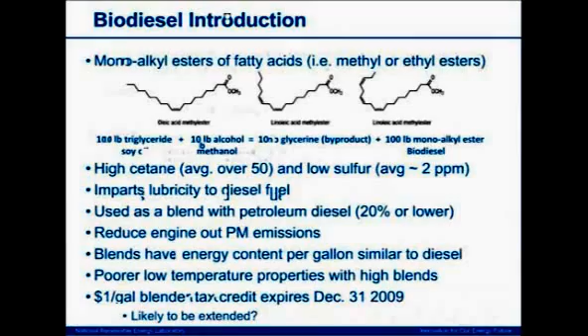This was also made worse by the U.S. government's non-implementation of the Renewable Fuel Standard Part 2, which likely will be implemented in 2010. So 2008 total production, according to the Energy Information Administration of the U.S. Department of Energy, was about 800 million gallons, and 2009 production is projected to be about 475 million gallons. So I think it's safe to say that 2009 has been a rough year for U.S. biodiesel producers.

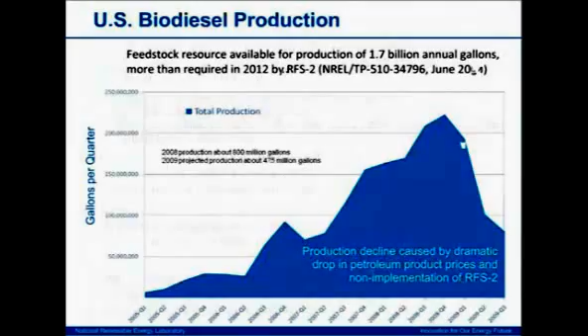One of the important things that addresses many of the market barriers for biodiesel has been the development of ASTM specifications that ensure the quality of biodiesel. The D6751 specification for B100 has been around for quite some time. This is for B100 to be used in blending petroleum diesel biodiesel blends up to 20%.

There have been a number of changes, more than just the two I list here, made over the past two to three years that were necessary to move biodiesel blend specifications forward at ASTM. I think the more important ones were oxidation stability and the addition of a cold soak filterability requirement.

Based on these changes to the B100 requirements, ASTM D975, the conventional diesel fuel spec, now allows up to 5% biodiesel in conventional diesel fuel. The heating oil specification also allows up to 5% biodiesel. And then there is a separate specification for higher level blends.

For the D975 and D396 specs, the performance requirements for B0, or 100% petroleum diesel, are essentially identical to those for B5. In the B6 to B20 specification, there's some modification of the requirements and the addition of some new requirements that appear to be necessary if you want to use these somewhat higher biodiesel blends.

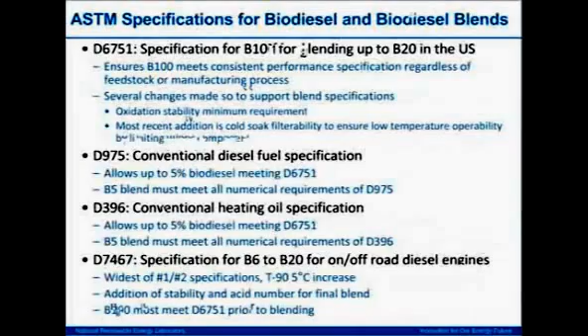So I think the two things, as I noted, that seem to be the most important changes are the addition of an oxidation stability requirement. This is a requirement that the B100 has to meet to ensure that it's adequately stable in storage. And then the stability of the B100 is really the main factor that affects the stability of the biodiesel blends.

And then also the cold soak filterability requirement. This limits the presence of minor impurities in biodiesel that have been shown to precipitate out at cold temperatures, but temperatures above the cloud point, and in some cases cause fuel filter plugging in winter conditions.

The cold soak filterability requirement was added a little more than a year ago, and by all accounts it's led to a dramatic improvement in the quality of biodiesel, both in terms of a reduction in low temperature operability issues, but there's anecdotal reports that it's led to improvements in a number of other ways as well.

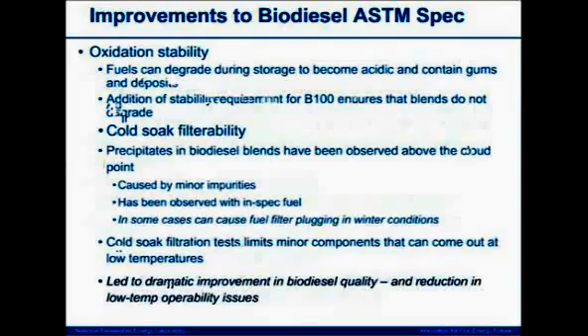Related, I think, to ASTM specs is the position of the engine manufacturers with respect to biodiesel blends. Basically, I'm not going to go so far as to say every engine manufacturer is approving of 5% biodiesel, but very nearly every engine manufacturer approves up to 5% biodiesel. Some approve higher blends, B20, and in a very limited number of cases, there's approval for even B100.

There's a detailed list that can be found at the National Biodiesel Board's website. These position statements are updated very frequently by the OEMs, so it's important to not rely on a year-old statement from a particular OEM. You really need to look and see what the most recent information is.

Some of the things that are limiting certain OEMs to B5 include concern about lube oil dilution from the fuel. Fuel always gets in the lube oil, but for slightly older engines, this hasn't been a major issue. For engines that use the engine's in-cylinder fuel injector to inject fuel during the exhaust stroke to regenerate the diesel particle filter, you can get very high levels of lube oil dilution with fuel, whether it be biodiesel or conventional diesel fuel.

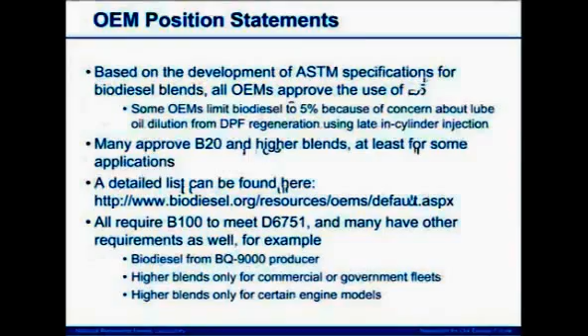But concerns about having these higher levels of biodiesel in the lube oil are preventing some OEMs from approving higher blends. Now, the biodiesel industry has a quality program called BQ9000, and essentially this requires the company that wants to be a BQ9000 company to develop basically a manual of procedures that they will follow to ensure that every drop of biodiesel they produce meets D6751. And then in addition to having these procedures in place, they are audited on site to see how they're implementing the procedures and to ensure that they're actually doing it.

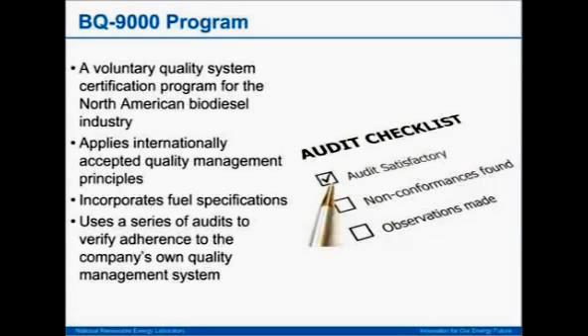This has been a very successful program, in my opinion. Over the years, we've gotten to the point where certainly more than half of the biodiesel production in the U.S. comes from BQ9000 companies, and over the past year it's been closer to two-thirds.

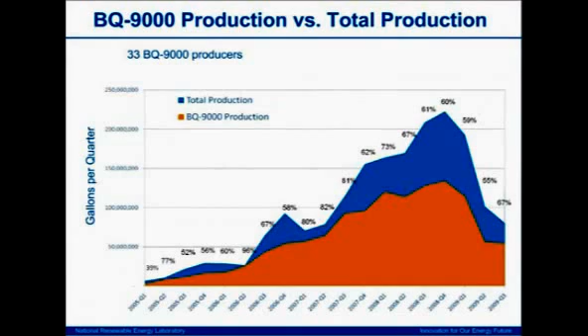We at NREL have periodically surveyed the quality of biodiesel in the United States by collecting B100 samples. The last time we did this was in 2007, where we collected samples from biodiesel producers representing 70% of the volume of production. We found that overall 90% of the production volume was meeting the requirements.

There were 15 producers that produced well over half of the biodiesel produced that year, well over 3/4 probably. And for those producers, 94% of the production volume complied with the spec. We had one sample out of that group that failed for water and sediment, so somehow became contaminated.

And then in the medium-sized producers, there was really a much poorer level of compliance, although at least one of the medium producers was a BQ9000 company, and their product was in compliance with the spec. And then the very small-scale producers had a much poorer record of compliance with the spec, although I have to note that we've worked with a couple of small-scale producers that do produce a high-quality product.

We currently have a biodiesel blend survey underway this winter, and in the spring we'll be doing a new B100 survey to see how the industry is doing now.

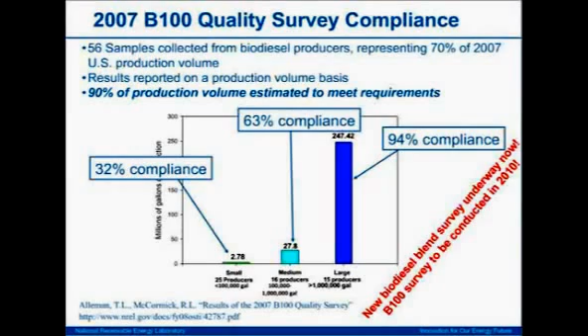I'm going to shift gears a little bit from my last couple of slides and talk about biodiesel's impact on air pollutant emissions and emission control equipment. There seems to be a pretty broad consensus that for engines not equipped with a diesel particle filter, biodiesel will reduce emissions of particulate matter, CO, and total hydrocarbon. For NOx emissions, there's been less consensus on what the effect of biodiesel is.

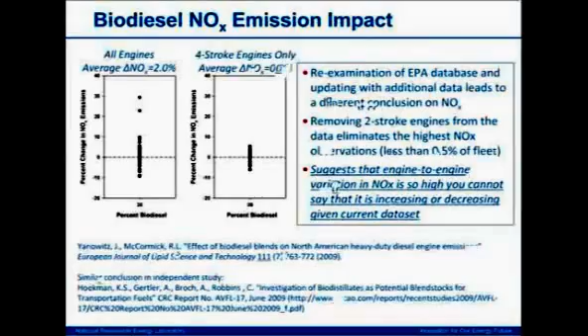And then the last thing I wanted to bring up was ongoing research on how biodiesel affects advanced emission control technologies such as diesel particle filters or urea SCR catalyst systems. All on-road diesel engines sold in the U.S. today are required to have a diesel particle filter, and beginning next year we'll start to see the introduction of NOx reduction catalysts. For biodiesel, there's some concern that it might cause short-term or immediate effects on the performance of these devices, and also concern about long-term durability impacts.

Studies to date have not shown any negative short-term effects. We generally see these devices performing the same with B20 as with conventional diesel. And there's some evidence that biodiesel may improve the function of diesel particle filters by increasing the reactivity of the soot and lowering the temperature required for regeneration. So the remaining concern is really the long-term impact of biodiesel on these devices, especially for heavy-duty applications where the defined useful life is 435,000 miles.

And most of this concern is related to the potential for there to be low levels of metals in biodiesel, sodium, potassium, calcium, and magnesium, which could lead to high levels of ash accumulation in the particle filter or some chemical deactivation of the SCR catalysts, particularly if the metals were present at the spec limit, which is 5 ppm for sodium plus potassium and 5 ppm for calcium plus magnesium in the B100.

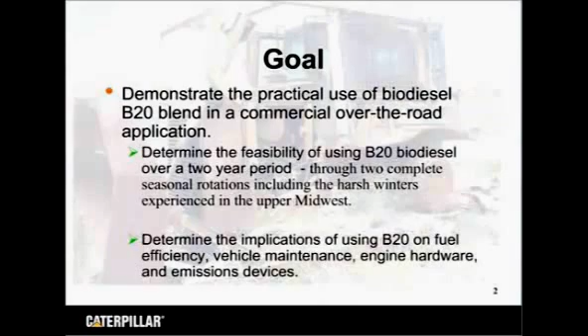So the goal was to demonstrate the practical use of biodiesel in an on-highway trucking application. So basically, what we were looking for here is the feasibility, the practice, the issues, and the implications on the on-highway trucks that use B20 in this study. This was definitely a collaborative effort, and a lot of organizations and companies participated in making this study a success.

The study design, which actually was probably the longest study of its kind of this level of biodiesel, had 20 total trucks, 10 of which were a control, and these were the ultra-low sulfur diesel fuel, and 10 were the B20 biodiesel fuel. In each group, there was one 2007 model engine, and the rest were 2004. The importance of the 2007 model is that it has after-treatment emission devices, particularly the diesel particulate filter, which Bob also talked about a little bit.

The trucks were matched in pairs, and they all had similar routes, similar design. One important thing to note here is that all of these had new engines, and these were Caterpillar C13 engines, which means that the implication of the history of the engine was removed in this study.

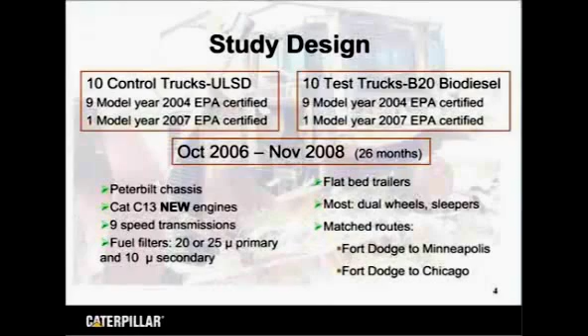The study design, there was a lot of data collection, significant. On a weekly basis, there were downloads from the trucks to understand their idle time, their speed, their fuel economy, the distance, so on and so forth. On a monthly basis, the fuel was tested. Oil analysis was done at the maintenance intervals. Maintenance records were kept meticulously of all costs related to the study. And when the study finished, we conducted hardware analysis. We tore down a few engines and looked in detail at the parts.

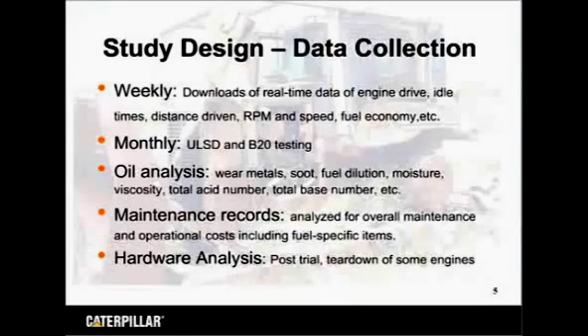Again, the study design, the fuel was mainly soy methyl ester. So it was an SME. It was provided by Renewable Energy Group, which is a BQ-9000 producer, and that's very important too. For a small portion of the study, 20% animal tallow biodiesel was used.

I also should mention that this study went through more than 2 years, from October of 2006 to November of 2008, and this means that it went through 2 harsh winters. And those who know the Midwest here, you know that we get very, very cold climate. So it's a significant challenge to see how biodiesel works in the cold winter temperatures.

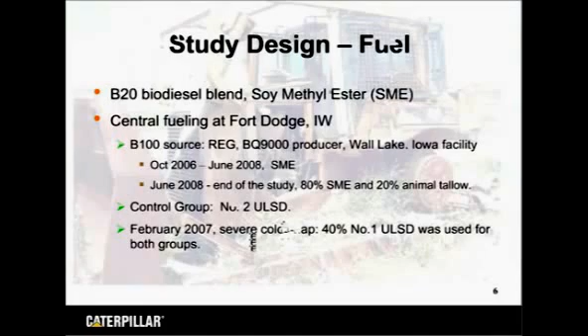The results that we saw here is that in using 6 commercial cold flow improvers, which are typically used with diesel fuel, we noticed that higher concentrations had to be used with biodiesel, and some of those that were successful in diesel did not really work well in biodiesel. And that's something important to keep in mind. So if you're using biodiesel, you really need to try which cold flow improvers work best for you.

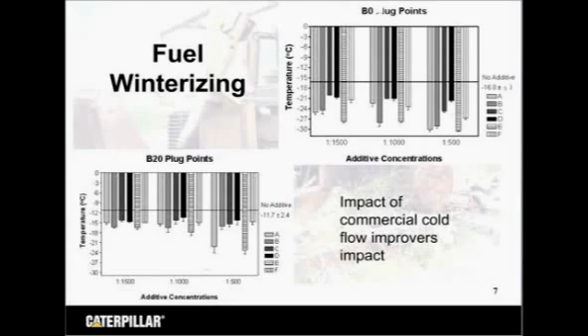In terms, again, of winter driving, the issues that we saw were basically fuel filter fouling, plugging, that is. There was no fuel gelling, probably because it was blended well. I also want to say that the fuel was very, very controlled. The trucks only fueled centrally, so there was no fueling on the road, so that we know exactly what the fuel was that went into the trucks.

I'm giving you here some of the numbers to show the difference in fuel fouling in the filters that were used. Some of these were preventive, that is, they anticipated fouling. Some of them were really fouled filters. What did foul the filters? Gas chromatography analysis showed that these were completely saturated monoglycerides. And we will have a report that details exactly what the chemical composition was.

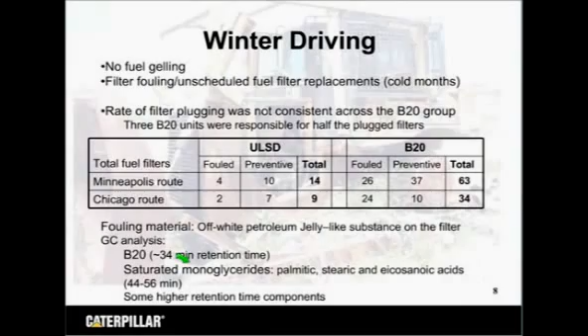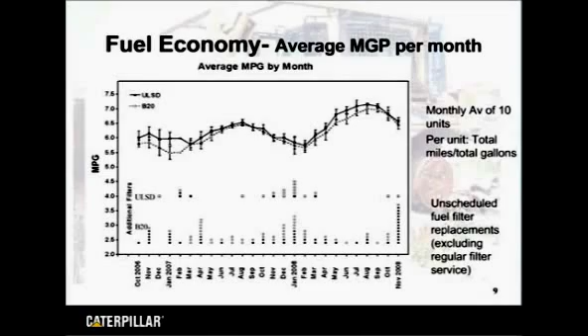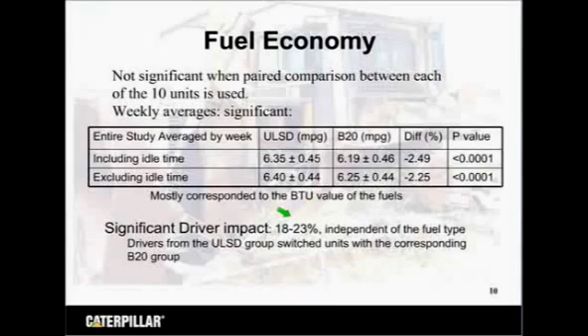Looking at fuel economies is very interesting because if you look at just drilling through a lot of data, you see that actually there isn't much significant difference between the two. But if we keep drilling into the data and use weekly average, we see that there was a difference, appeared to be about 2.5 to 2.25%. However, important to note, and this is the challenge in looking at fuel economy in any application, that the driver impact was 18 to 23%. So this impact here becomes a little bit small compared to what the driver impact is.

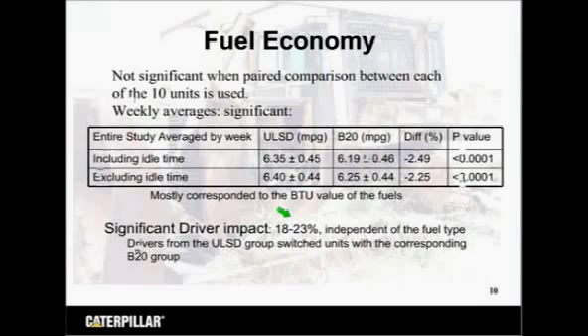Maintenance record, a meticulous account of maintenance records of all the costs associated with the trucks, showed that basically there was no significant maintenance cost. The only difference was the fouled filters, which was about 3 times higher cost for B20.

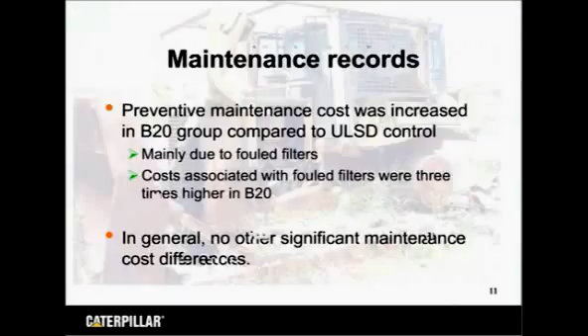Engine oil impact, that's again another very important question for the industry and for those who are using biodiesel. We notice here that there was actually no impact. The maintenance intervals remained the same, wear metals and all the aspects of the oil remain the same. I want to state, though, and want to be clear, that these are very much dependent on the engine model. So in this study, this was the result. I encourage anybody who uses biodiesel to certainly use oil analysis before determining maintenance intervals.

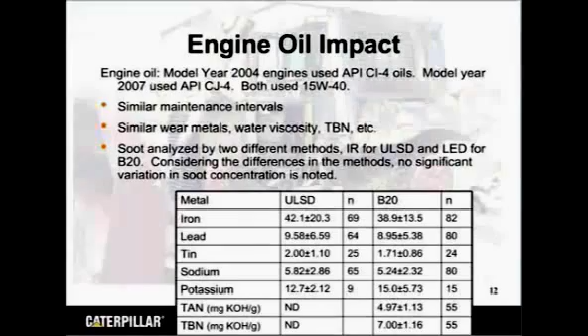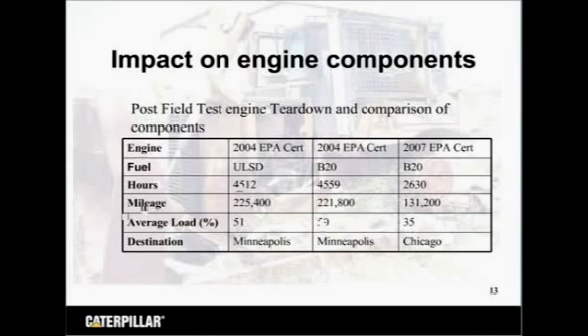Again, we looked at engines. We looked at 2 pairs from the 2004 models and one of 2007. Looking at various hardware components, I'm giving you here some important components. The hoses, there was no adverse effect, but it's important to mention that these were FKM hoses, so they were biodiesel compatible up to this blend level. Intake valves, exhaust valves, there was no difference.

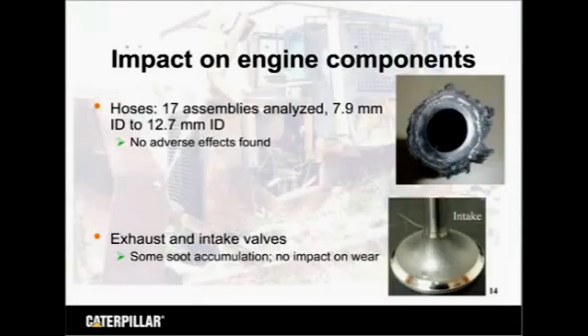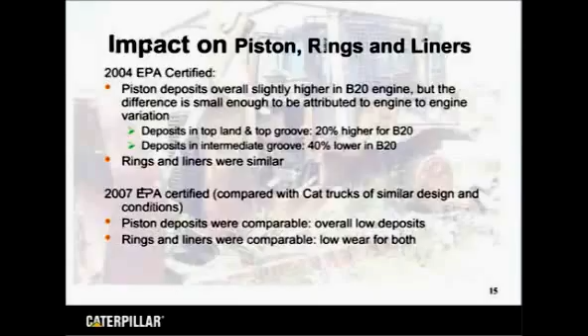Again, another very important applicability point for biodiesel is the injectors. And these are basically the front line for any impact of biodiesel. For these engines, we took two sets of 6 injectors each, and we looked at them in every possible way in terms of performance, discharge, timing, peak injection pressures, features of the various components of the injectors. And we saw both were very similar. We could not pick out differences specifically related to biodiesel. They were where we expect them.

At the mileage, these trucks had 225 to 250 miles on them. And, important to state, we also did not see any varnishing or deposits on the seating band. However, there was one difference in the injectors. The tips of the B20 injectors had a continuous layer of combustion products built up. It was in the sac and up to the edge of the orifice hole. However, no impact on performance was noted.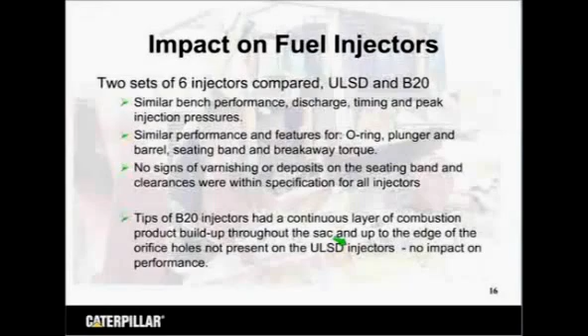This is here detailed. You see the injectors here. And again, you see the combustion products, combustion layer. At this mileage, again, there were no performance implications. We noted this because we looked at these at high magnifications and very, very closely. It's important to watch the long term, maybe at 500,000 miles; it's important to keep an eye to see what the implications long term would be.

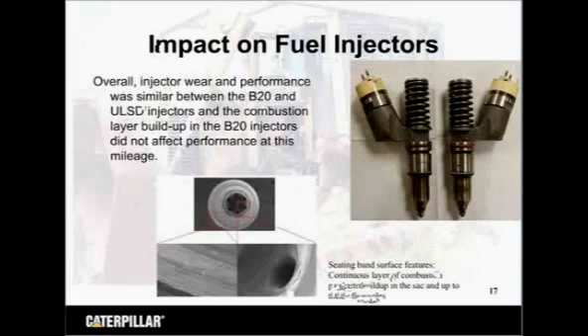Diesel particulate filter. This is the after treatment device that is also of key importance to the applicability of higher blends like B20s.

Note that we looked only at one diesel particulate filter, so this is one data point. And as we expected, we noticed that there is a 19% increase in ash accumulation in the diesel particulate filter.

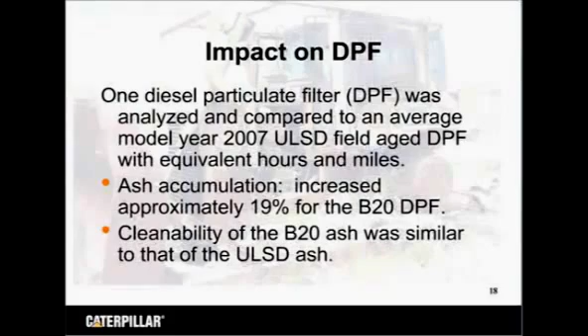Cleanability was similar, so overall we have a lot of positives. This was definitely a successful demonstration of using B20, which was dependent on the management of the fuel, the overall management of the study, the fueling, and having winterized fuels and knowing what to expect. So maintenance, fuel economy, and engine hardware all did not show any negative impacts. The only thing we can say is negative at this point, and we don't know the long-term implication, is the diesel particulate filter ash.

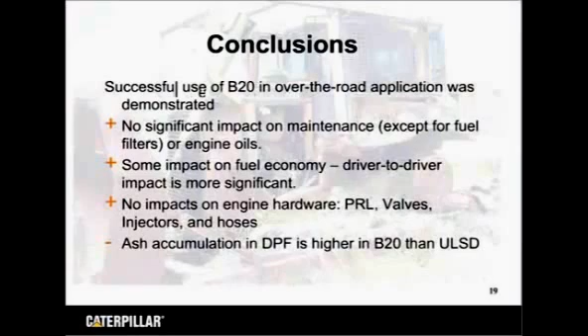Again, this is another area we need to watch for long-term implications. From this study, what we can recommend is that for biodiesel, we routinely measure the phosphorus, alkali, and alkaline metals, because that enhances the BQ 9000 program. It can allow us to model and anticipate what will happen with after-treatment devices.

The other thing is we definitely need standardized, biodiesel-specific oil analysis, because at this time it's still dependent on the savvy of the tests in research labs when looking particularly at biodiesel in the oil. This needs to become standardized. And that concludes what I have, and I appreciate your time.

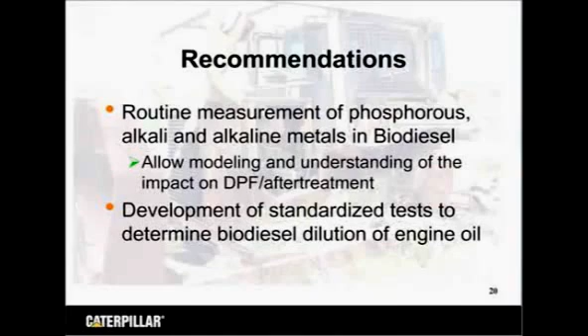Thank you very much, Hen. That was very instructive, and I think all the participants would share the view I have of being able to see the injectors and the different components visually like that. It really helps frame an image of some of the impacts of use of biofuels and helps make some of your remarks very clear.

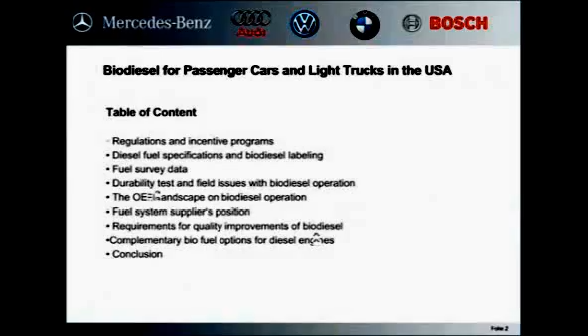Following my content list, let's first have a look at the regulations and the incentive programs. On the federal level, the Energy Independence and Security Act requires the production of biomass-based diesel fuel to further increase. In addition, in individual states, a variety of regulations and programs exist, including some incentives that support the production and sale of biofuels. I think the most famous one is in Illinois, which provides a tax incentive, and therefore B11 is the predominant diesel fuel in Illinois.

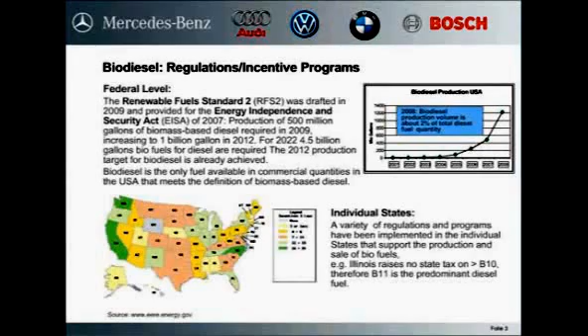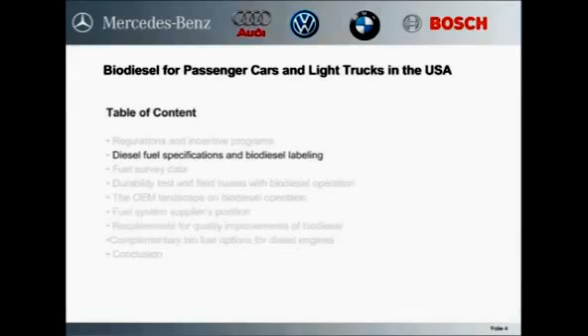Diesel fuel specifications and biodiesel labeling: since 2008, revised standards exist that include specifications for B5 and for B6 to B20. The B6 to B20 specification requires an oxidation stability of 6 hours minimum. In comparison, the European spec requires 20 hours at the minimum. According to what we know, the specs are not mandatory for biodiesel producers in the U.S.

Labeling requirements have been implemented since 2008, and as a result, customers today know when they fill biodiesel in the tank. This is some progress. A non-compliance penalty will be imposed if fuel station owners fail to label.

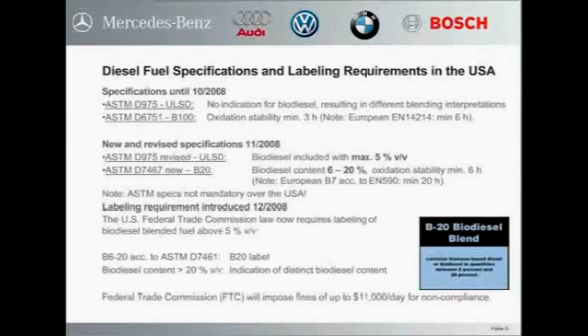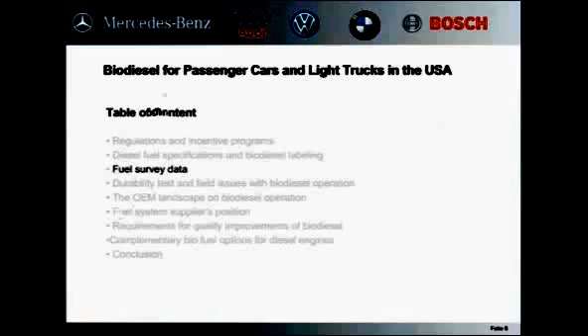Now let's have a look at some fuel survey data that we collected in 2008. This slide shows data from a survey conducted by German car manufacturers last year. On the left figure, you see the oxidation stability in most cases was not just below the European B7 specification, but 32% of the samples did not meet the new 2008 specification for B6 to B20.

On the right picture, you see the water content was always below the ASTM spec, but in several cases it would not meet the European B7 standard. Also, you can see there is a tendency for oxidation stability and water content to get worse with increasing blend rate.

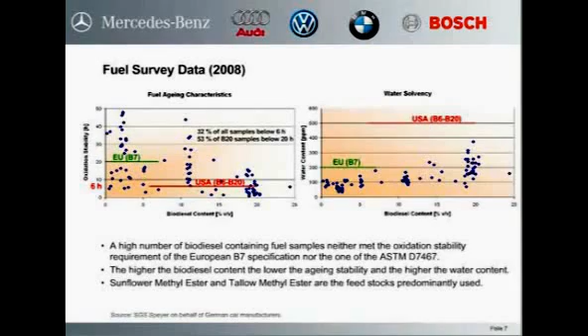What can I say about durability tests and field issues that we have seen with biodiesel operation?

Before we look at the test and field issues from vehicles operated with biodiesel, let me emphasize that the risk of issues with engines or engine components resulting from biodiesel operation depends on a variety of parameters, primarily production and storage of the fuel, environmental conditions, temperature, and the operation cycle of the vehicle in customers' hands. Heavy truck operators may have totally different experiences with biodiesel than a private passenger car owner.

What you can see in this slide is that some unfavorable fuel properties, production shortcomings, and remaining deficiencies in the specification may create issues with biodiesel operation. As a result, we see fuel filters being clogged, fine sticking and corroded fuel system parts, particularly after standstill periods, and injection nozzles being coked with deposits on the injector.

The blend rate is the other major parameter. Primarily engine oil dilution, sludge in the engine oil and on engine parts, and deposits on piston rings and in the EGR system usually increase with increasing blend rate.

As the light-duty vehicle fleet in the U.S. is still relatively low, we do not have a broad basis of statistical data, but a number of serious issues have already been identified. For example, vehicle durability tests with B20 fuel show frequent fuel filter clogging, and frequent in this case means every 3,000 to 25,000 miles. We have also seen high-pressure fuel pump parts failing at low miles with B100 use.

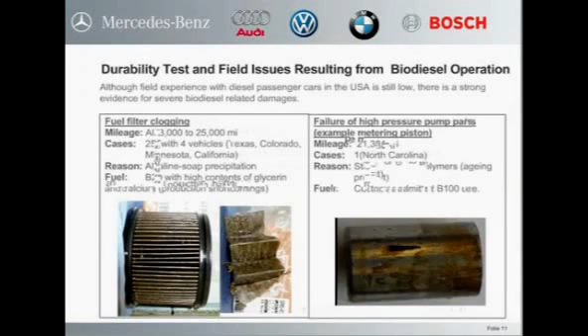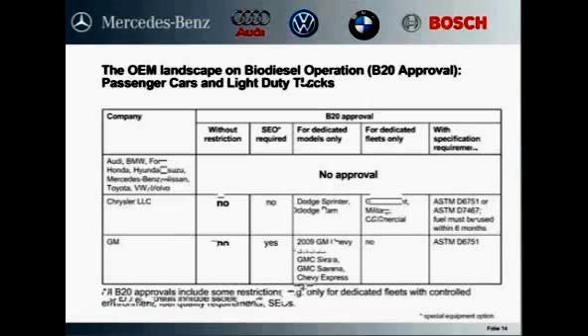Now, what is the position of the fuel system suppliers? The common position statement of the major fuel suppliers from 2009 expresses the concerns they have with low-quality biodiesel or with fuel that is not successfully evaluated. Therefore, fuel system suppliers usually don't take responsibility for damage on fuel systems resulting from low-quality biodiesel operation.

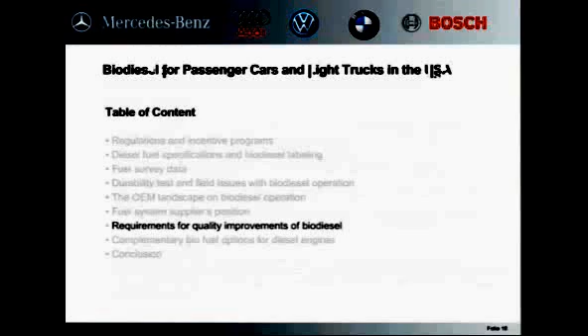What are now the requirements for quality improvements of biodiesel? The German car OEMs and the fuel system suppliers see some need for quality improvement. Major parameters that need to be considered are the oxidation stability, the percentage of methyl esters with double bonds, the purity, and the cold soak filterability. Moreover, from our point of view, a monitoring system that ensures a certain standard should be implemented.

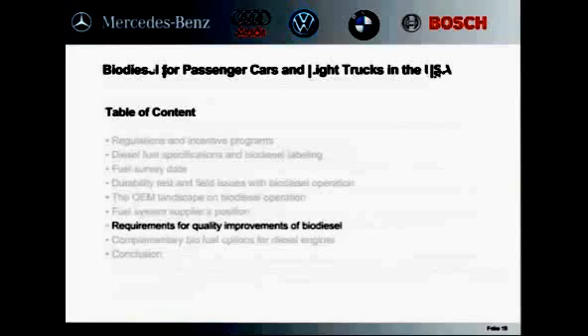We also believe there are some complementary biofuel options that we need to consider, for example, vegetable oil or biomass to liquid. From our point of view, there is not one exclusive source of biofuels. There are opportunities for different kinds of biofuels that are compatible with each other, and a fuel with biodiesel and HVO can be designed to have a high bio content and excellent properties for the engine as well.

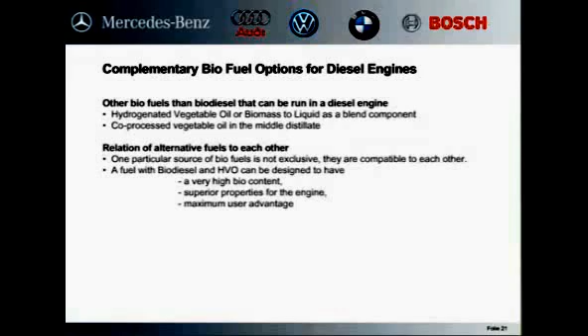Let me conclude now. Today's diesel engines with sophisticated emission reduction systems require clean and high-quality fuels. We believe there is significant need for improvement of specification and production process of biodiesel, and from our point of view, monitoring of the quality of the biofuel being sold should be considered.

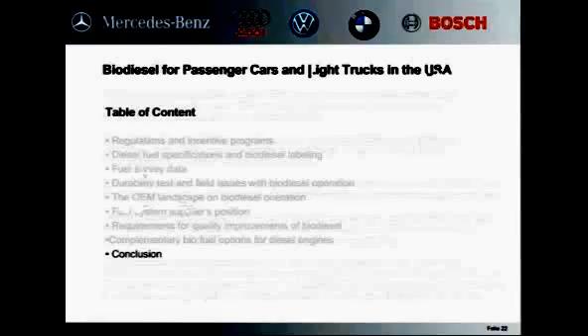Today, the German car OEMs approve the use of B5 only according to ASTM D975-08, which is actually ultra-low sulfur diesel with a maximum 5% FAME. Similar to Europe, all of us will be happy to approve a maximum biodiesel blend level of 7% FAME if the overall quality parameters have been further improved.

At the end, let me emphasize, we do support the development of B20 or even higher blend rates. But the rate increase needs to come from paraffinic and renewable high-quality biofuels, like, for example, hydrotreated vegetable oil or biomass to liquid fuel. Also, significant testing is necessary in order to ensure reliable vehicle operation over the wide range of operation conditions that we see with small diesel vehicles in customers' hands.

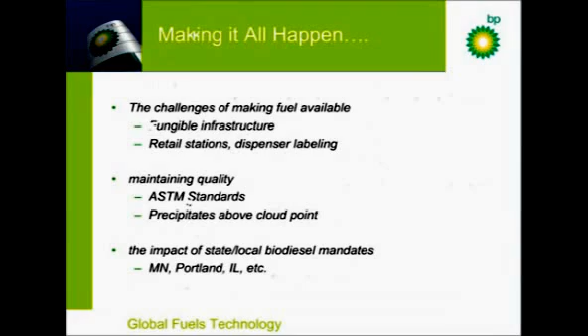The first thing is the system is fungible, and that means diesel fuel is a commodity. The refineries, the pipelines, the terminals, the transport haulers you see on the road, and the retail sites may all have separate ownership. Back in the day, there were integrated oil companies that owned all these things, but we're moving away from that. It makes it a challenge because a major oil company may have the refinery, but not the pipeline or the terminal. So we all have to work together, and that's where things like ASTM become important, because we need good agreement on what the specifications for biodiesel should be.

One of the biggest challenges or drivers in how we distribute the fuel is that biodiesel is not allowed in pipelines that carry jet fuel. The concern is that the biodiesel will trail back or get mixed in with the jet fuel and cause it to go off spec. And as everybody's aware, jet planes don't pull over to the side of the road, so protecting jet fuel is a high priority. So the pipelines have not allowed biodiesel to go in there. There are a few that do, but those don't carry jet fuel. For the most part, biodiesel is not moved in pipelines.

This is similar on the gasoline side with ethanol, which is also not moved in pipelines. So the biofuels, ethanol and biodiesel, are typically blended at distribution terminals. Most people have seen these terminals, the big white tanks you sometimes see on the side of the road, holding 100,000 barrels of fuel. There is a project going on right now to approve a small amount of biodiesel into jet fuel, 100 parts per million. That amount is considered to not harm the jet fuel, and once that happens, it will facilitate moving blends up to B5 on the pipelines, which will really open up the infrastructure quite a bit.

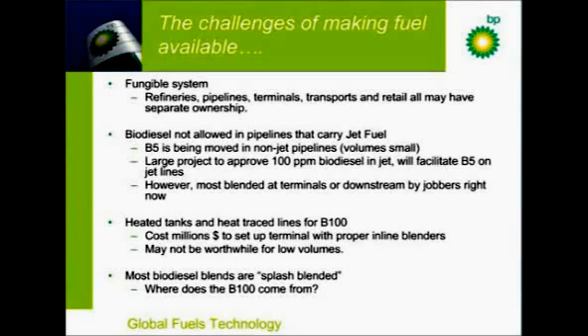So, biodiesel blends at retail. One of the things about biodiesel is it holds more dissolved water than diesel fuel. When I talk about dissolved water, that's the amount of water a fuel like biodiesel can hold before it starts becoming hazy. If you see haze in the fuel, you've got free water.

Regular diesel fuel can only hold about 50 parts per million, maybe 100 parts per million of water. Biodiesel can hold about 1,500 parts per million before it starts to get hazy. The biodiesel blends, a B20 or lower, will hold a similar amount to diesel fuel, again around 100, maybe a little bit more. Typically, that's not a problem.

If you get excess water in the system, that water will turn to haze, and then those water droplets will eventually drop to the bottom of the tank. If you look in the bottom of any diesel fuel tank, you'll find water on the bottom to some extent. You'll find the same thing with biodiesel. So water is not nearly as big of a problem. When you're talking about ethanol and gasoline, water can be a huge problem for ethanol.

Equipment compatibility. UL is Underwriters Laboratory. They approve a lot of the dispensing equipment. You may be familiar with them—they approve a lot of electronic devices and stuff. If you flip over your computer, you might see a UL label. They need to approve the dispensing equipment for retail sites before the fire marshal of that state will sign off on the equipment, and to do that they do all kinds of testing, then they approve it.

ASTM standards—some of the other presentations touched on this, so I won't go too far into detail. Just want to mention that ASTM is a consensus process. It's made up of oil companies, biodiesel producers, engine manufacturers, general interest groups. The pipeline will have representatives there, state regulators will be there. They all come to an agreement, and the results of that process are standard specifications.

D975 is the big one for diesel fuel oil. D6751, which has been mentioned, is the standard specification for biodiesel blend stock. Most states have laws requiring ASTM specifications, but not all states, and some states will modify the ASTM specifications a little bit. There is no federal law for diesel fuel, and no federal law for biodiesel.

It's all done at the state level. There are a few states out there that don't have any fuel laws. Those types of states, though, typically the ASTM specifications still kind of govern what's going to be made, because nobody's going to make a fuel that's acceptable in one state and not another. So for the most part, all of the fuel in the U.S. meets D975, all the diesel fuel.

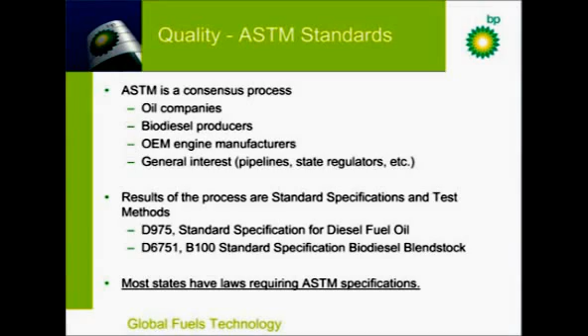The other specification, 6751 - Steve Howell, who's going to be joining us later, wanted me to point out, and it's an excellent thing that he did, that biodiesel not meeting 6751, even by a little bit, can cause problems. Meeting the spec is critical. We've seen that a lot of times when there's biodiesel situations out in the marketplace - when you really get down and look at them closely, you find out it's biodiesel not meeting 6751. Technically, if it doesn't meet 6751, it really shouldn't be called biodiesel.

When the fuel meets 6751, for the most part, we don't have problems. One of the problems we did run into, mentioned by some earlier presenters, has to do with saturated monoglycerides and some other impurities. The cold soak filterability test was recently added to 6751 to address some of those issues. We'll talk about that on the next slide.

One of the big things was this B5 now being incorporated into D975 diesel fuel. That means a B5 blend is technically diesel fuel, and somebody selling diesel fuel to you may have 0, 1, 2, 3, 4, or 5% biodiesel in there. That's caused a little bit of difficulty out there for some people. If somebody buys diesel fuel and wants to blend B5 into it on their own, it may already have 5% in it, and 5 on top of 5 may cause them to make something that would be a B10, and therefore it would have to meet a different specification and different labeling requirements.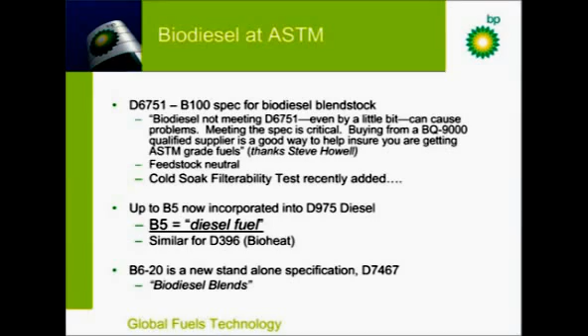The cold soak filterability test was designed to catch precipitates above the cloud point. There was some problems with filter plugging at relatively warm temperatures. Diesel fuel typically has a cloud point of 5 degrees F, maybe up to 15 degrees F - that's where you first start seeing the wax crystals coming out. But people were running into problems with some biodiesel blends where they were having precipitates drop out of the fuel at temperatures well above the cloud point. So this cold soak filterability test is a performance test to catch those.

Briefly, you take 300 mils of the B100, cool it 16 hours at 40 degrees F - that's close to what a refrigerator is, so it's not a real cold temperature, it's a cool temperature. Here in Naperville, 40 degrees F would be a nice warm day in the winter. So that 16 hours at 40 degrees F is the cold soak part of the test. The sample is allowed to rewarm back up to room temperature, and it's filtered through a 0.7 micron filter. It needs to get through that filter, the 300 mils, in 360 seconds to pass the test.

If the biodiesel is going to be used in a 10-degree Fahrenheit or colder climate, then it needs to pass in 200 seconds. This cold soak filterability test did remove much of the bad B100 in the marketplace. A lot of the problems we saw in Minnesota in the first year, I think, can be traced back to fuel that didn't have real good cold soak filterability times. Now that the specification's in place, we've seen the amount of problems go down dramatically. It doesn't, however, catch all the problems.

Here in Naperville, Illinois, we do a lot of B11 blending, and it has to do with the tax break. I went out last winter and grabbed 8 samples, after the cold soak filterability spec was in place. Tested them: 3 were straight diesel, 5 were B11 blends. After 24 hours in a refrigerator at 35 degrees F, 3 of the B11s had precipitates. After 48 hours, they all did. Leaving the samples in there for a week, none of the diesels had any precipitates. So it's coming from the biodiesel.

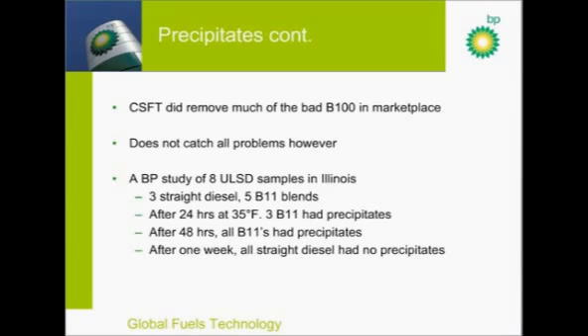I've got a little video here - Kristen's going to help us. Basically, this sample was put into - it's a B11 sample bought at a retail site here in Illinois - put into the refrigerator overnight at 35 degrees. Hopefully it's going to show up well here, but if you give it a little swirl, you can kind of see these precipitates rising up off the bottom.

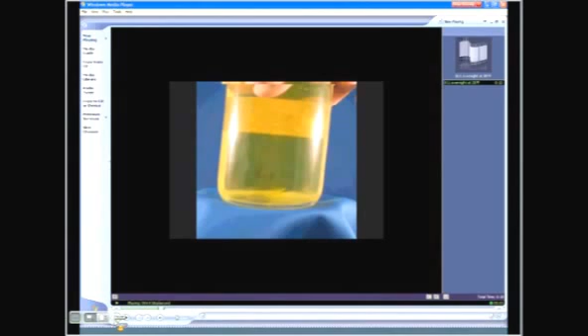If anybody wants to evaluate their biodiesel, it's a simple test. I'm not going to recommend you put it in your refrigerator with your food, but if you can put it somewhere where you can get it down to about 35 degrees, let it sit overnight, and then take a look at the bottom and see if you see anything there. Give it a little swirl and see if you can see that stuff rising up off the bottom. So we'll move on to the next slide.

What those things are is, it was kind of mentioned in Hin's presentation, they're saturated monoglycerides, and they're a byproduct of biodiesel production. All biodiesel has it to some level. It's kind of feedstock dependent when you run other feedstocks. Soy doesn't have a whole lot of the saturated monoglycerides in there. Tallow has more. It kind of goes back to the saturation levels of the feedstocks. Soy oil is about 15% saturated fatty acids, where tallows are more like 45%.

And there's kind of a correlation between the saturation level of the feedstock and the biodiesel to the amount of saturates that are in there. Tallow will be a solid at room temperature, where soy biodiesel is a liquid. So catch up to that slide. These monoglycerides that fall out, again, it's the saturated monoglycerides. They've been linked to causing some filter plugging in dispenser filters. They don't cause as many problems in vehicle filters.

The vehicles typically have a recirculation loop where fuel goes up to the engine, and then it goes back to the fuel tank, and in that process gets warmed. And as the fuel warms up, if you do have some saturated monoglycerides trapped on the filter, the fuel system's pressure and the warmth of the fuel will typically force those monoglycerides through, and they don't seem to cause problems in the engines. So for the most part, this hasn't been a huge problem, but it is a problem that's still out there.

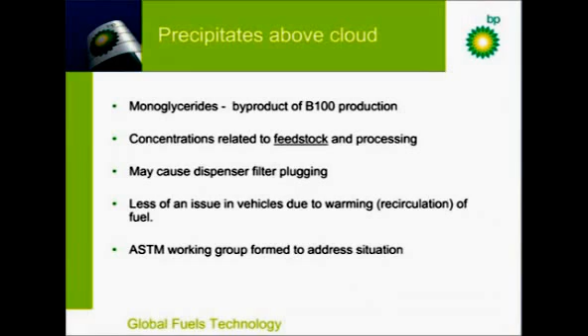And ASTM's formed a working group to address this situation. The biodiesel producers and everybody working with ASTM has done a great job in trying to address these situations when they come up as quickly as we can to have a biodiesel fuel that's more fit for purpose.

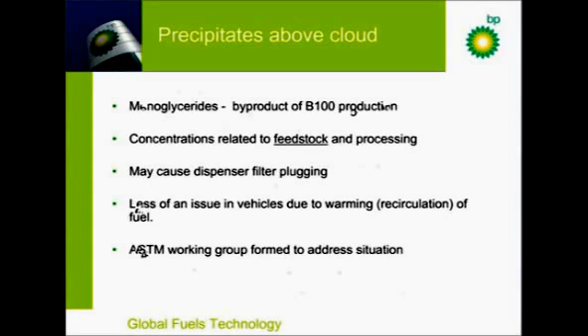And then briefly we'll go over the state mandates and some incentives. Minnesota, I mentioned, had a B2 mandate that started in 2006. It recently moved up this year to B5. This will be the first winter for B5 in Minnesota. In the future, it'll go up to a B10 and a B20. In the winter, though, Minnesota will still stay at a B5, so they'll have like a B20 in the summer and a B5 in the winter. Portland, Oregon is at a B5. The rest of the state is at a B2.

Washington State has 2% of the diesel pool, so not every drop has to be B2. If somebody sells a B20, they can use that to average some straight diesel fuel. Pennsylvania's got a B2 mandate coming up January 1st, very soon. Massachusetts has a B2 mandate coming up July 1st. And then the big thing out there is the Illinois tax incentive. I mentioned that here in Illinois we have a lot of B11. That's because the state has no sales tax when you blend greater than 10% biodiesel into diesel. That's where the 11 comes from, if you're wondering why we have such a strange number.

I read some report that said about 40% of all the B100 in the U.S. goes through Illinois, so there's a lot of biodiesel blending in Illinois. And I have a diesel pickup truck, and just from what I've seen going out to retail sites around Illinois, probably about 75% of the retail sites in Illinois are dispensing B11. And that's easy to see because they all have to have that FTC label.

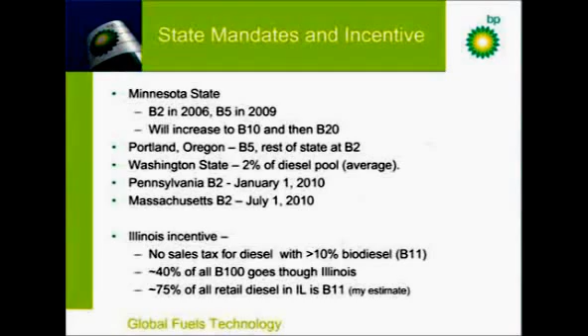And a little more on state mandates. The RFS2 sets the bar really high for biodiesel blending volumes. The state mandates that are out there, those volumes that you blend, like what we do here in Illinois and what we'll be doing in Pennsylvania and Minnesota, they'll all count towards our RFS2 obligation.

So the state mandates won't make a net increase in the amount of biodiesel that's blended out there. We're going to have to do all the state mandates and then some to meet RFS2 once it goes through. But what the state mandates do is they dictate where the blending will occur. Obviously, in a state like Minnesota where they have a B5 mandate, we have to blend there, and every drop has to be B5. And all of our competitors have to be B5. So what they do is they wind up making the market consistent, at least in those areas.

In other areas where you don't have a mandate, if one company chooses to sell biodiesel blends, the guy across the street may be selling straight diesel fuel. And there's pros and cons to that. It gives the consumers a choice when they have an open market like that, but then, if there's an incentive, the guy that's getting the incentive is kind of at an advantage to the guy who's not getting the incentive for blending the biodiesel.

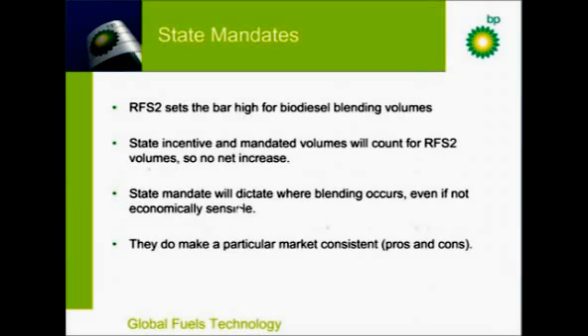So, in conclusion, biodiesel blending for oil companies is very challenging and it's not straightforward. The rules don't seem to be as straightforward as ethanol blending. All ethanol blending happens at terminals, whereas biodiesel blending just isn't as well defined. The ASTM standards have helped ensure quality by reputable producers, and we recommend you always insist that your biodiesel meets D6751. There's still some quality concerns left to correct, and everybody at ASTM is working on that.

And RFS2 and state mandates are really going to heavily influence biodiesel blend availability in upcoming years. The economics aren't really there for biodiesel at the moment, and if the RFS2 mandate goes through, you're going to see a lot more biodiesel in the marketplace.